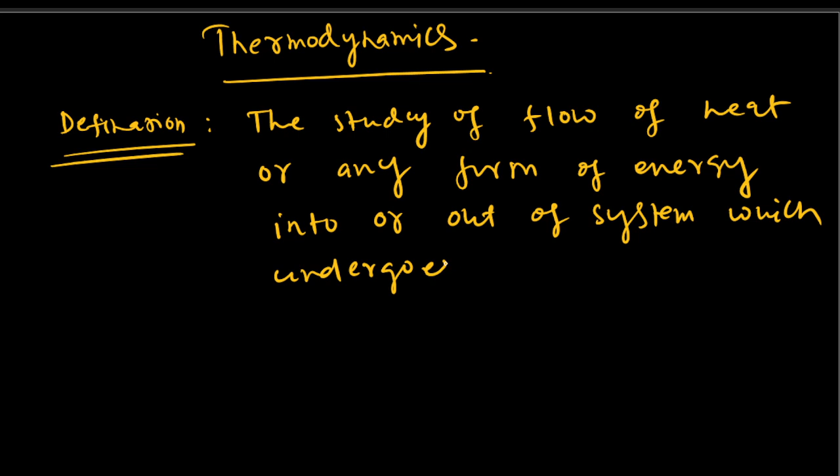Thermodynamics. So if you say the definitions, what we are doing here, you can say that it is the study of flow of heat or any form of energy into or out of systems which undergo a physical or chemical transformation.

So thermodynamics we can define as the study of flow of heat or any form of energy into or out of systems, which undergo physical or chemical transformations. So in thermodynamics we are mainly studying the flow of heat or any form of energy.

So before you start thermodynamics, we should know some terminology, some terms which we are using in these chapters repeatedly. So the terms of these chapters are: first is system. What is the system? System is the part of the universe which is under thermodynamic study.

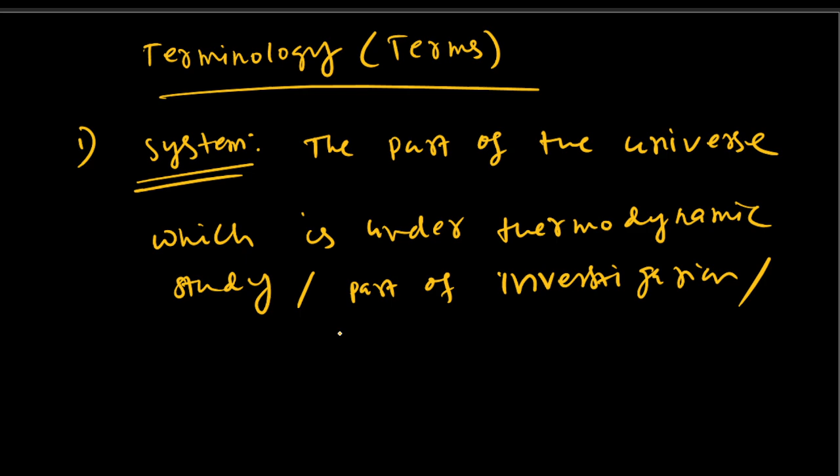Or part of the universe which we are interested in, or which is part of investigations. So the part which is under thermodynamic study, or part of investigations, or part of observance. So that is the part of the universe which we are actually interested in, which we are studying. So that part of the universe we call systems.

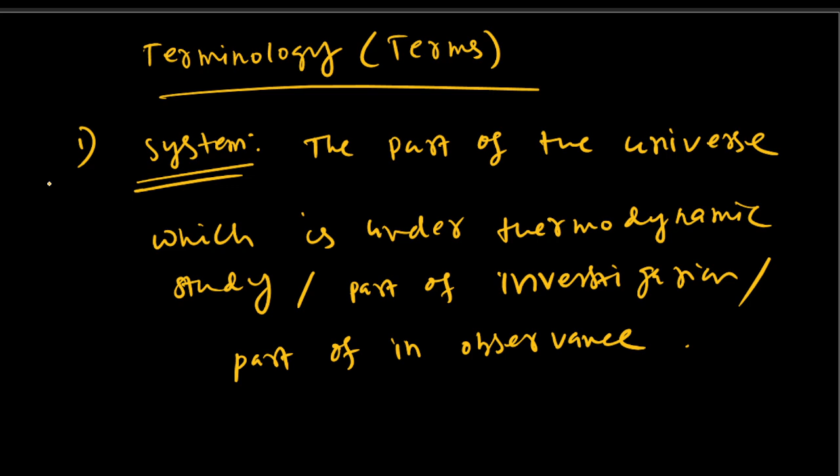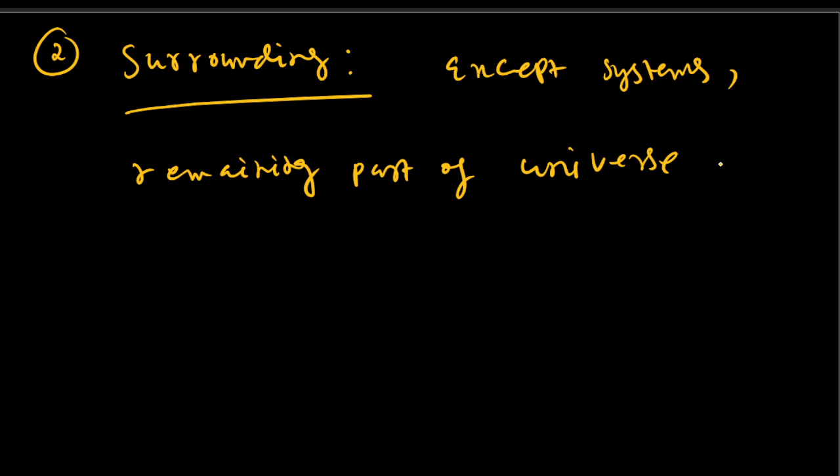And for surroundings, what is surroundings? So except systems, other parts of the universe are called surroundings. So except systems, the remaining part of the universe is called surrounding. So if you leave the systems, then whatever the remaining parts, all that is called the surrounding of that system.

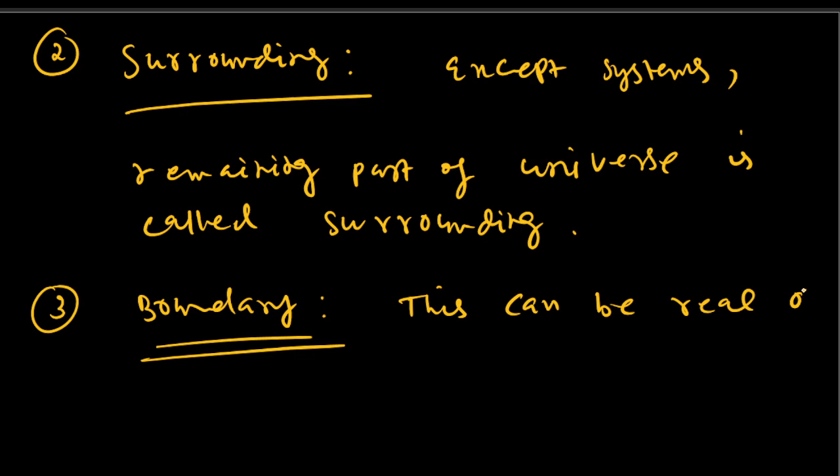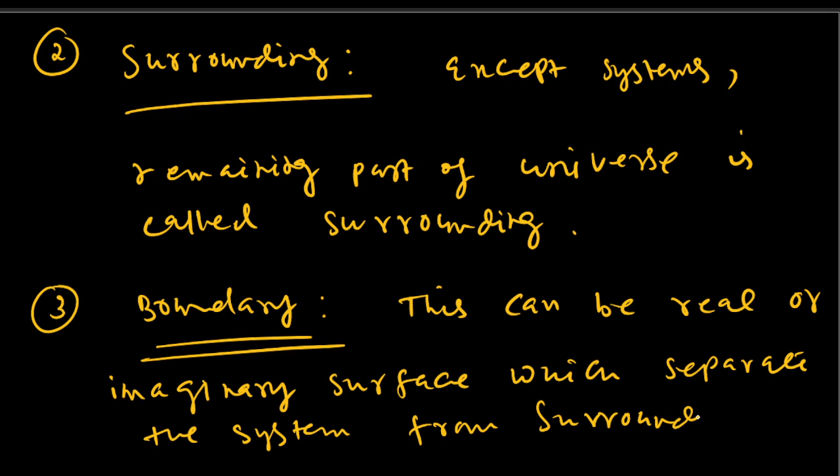So the next terminology we will look at is boundary. So what is boundary? It can be a real or imaginary surface which separates the system from surrounding. So that surface which separates the system from surrounding is called boundary. And this boundary can be a real boundary or can be an imaginary boundary.

So let's see this in the open systems. So this is system. Suppose this is water. So this water is system. Surrounding is the remaining part of the universe other than the system. So this is surrounding, this is surrounding. Except system, everything is surrounding. So these all are surrounding.

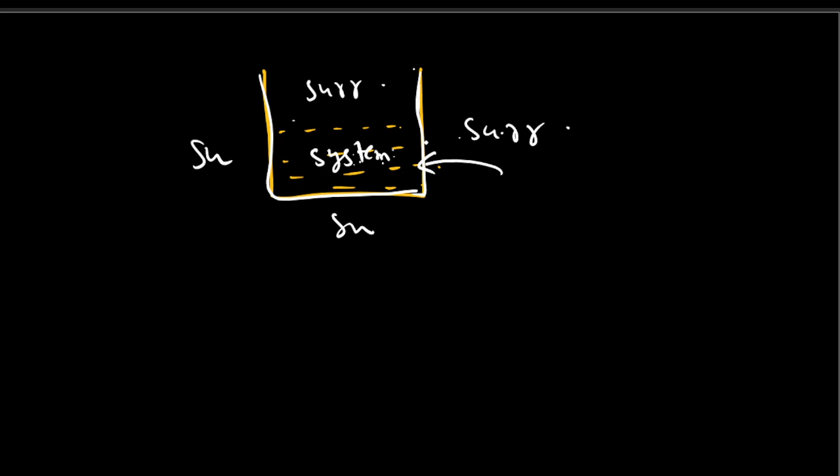So this system and surrounding are separated here, where no real boundary is present. But here, between this surrounding and this system, there is a boundary: this glass. Suppose this is a beaker made of maybe steel or something. So this is a real boundary, a real separation between this system and surrounding. And from here, this is surrounding, this is system, and these are separated, but there is no real boundary there. So this is an imaginary boundary. So boundary can be real or imaginary.

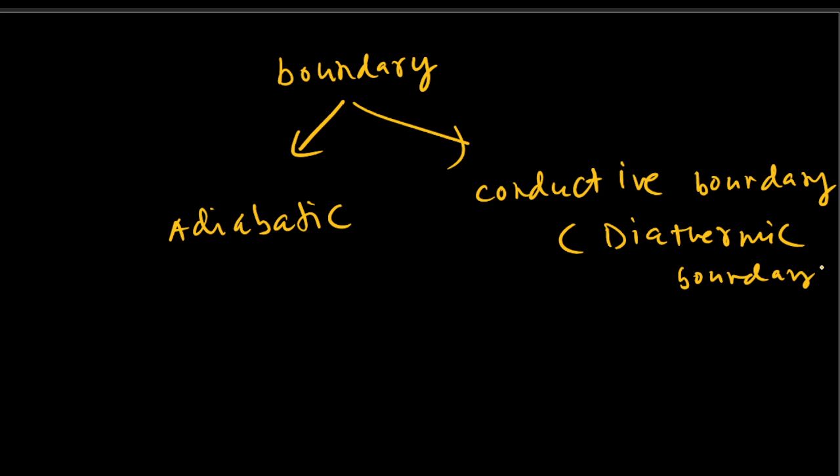And boundary can be adiabatic or can be diathermic. It can be adiabatic or can be a conductive boundary, which we can also call a diathermic boundary. So how can you say? Suppose this is a closed vessel and water is there.

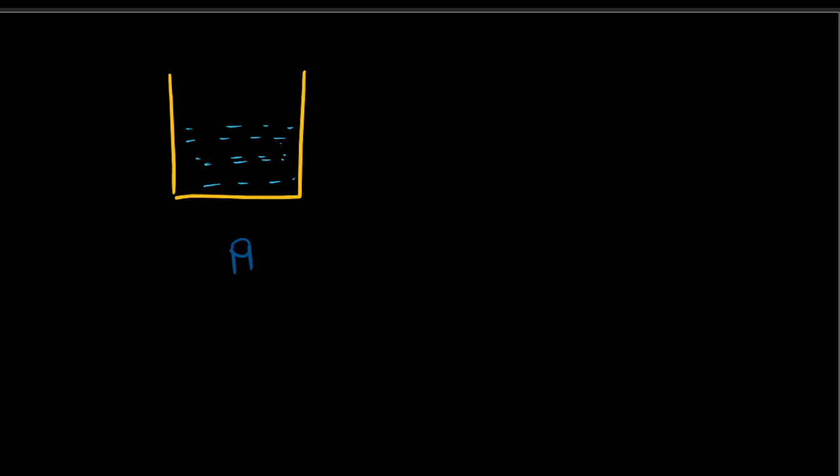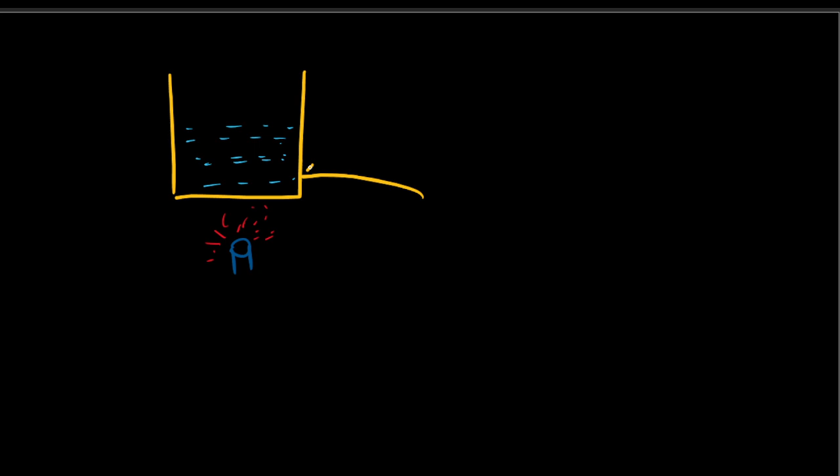And if you are giving heat, suppose this wall is a conducting wall, which means heat transfer can occur. So for a conducting wall, heat transfer can occur. So this heat will be transferred to this water, and this water gets heated and will evaporate. So here this boundary is called a conducting boundary.

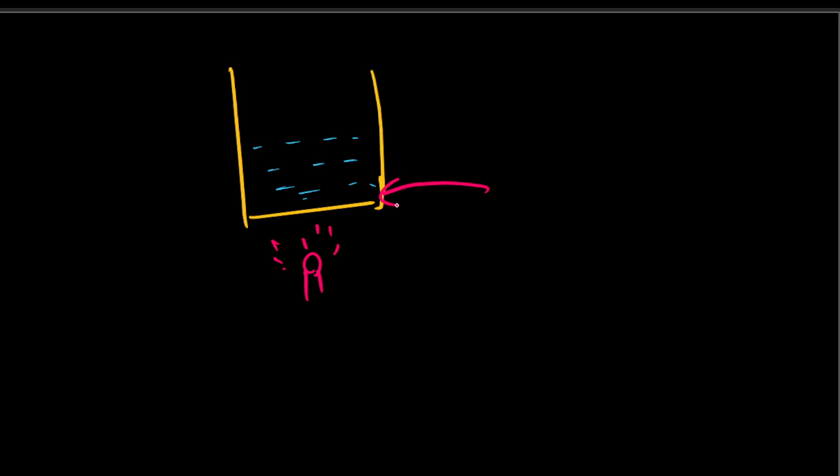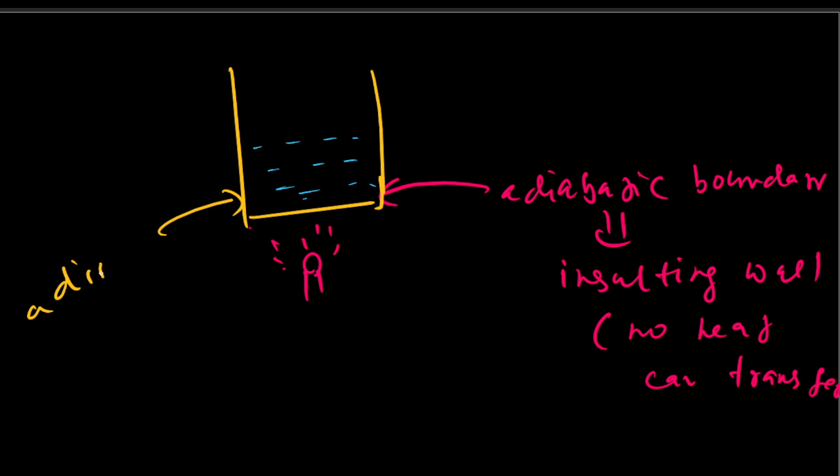And another type of boundary is, suppose here water is there, and again we are giving heat, but this is an adiabatic boundary. Adiabatic boundary means an insulating wall, meaning no heat can transfer. So in this case, if we heat, this water will not get heated because the wall is not allowing the heat to transfer. So this is an adiabatic boundary, where heat is not transferred. So boundaries can be real or imaginary, adiabatic or conductive. So next we will study the types of systems.

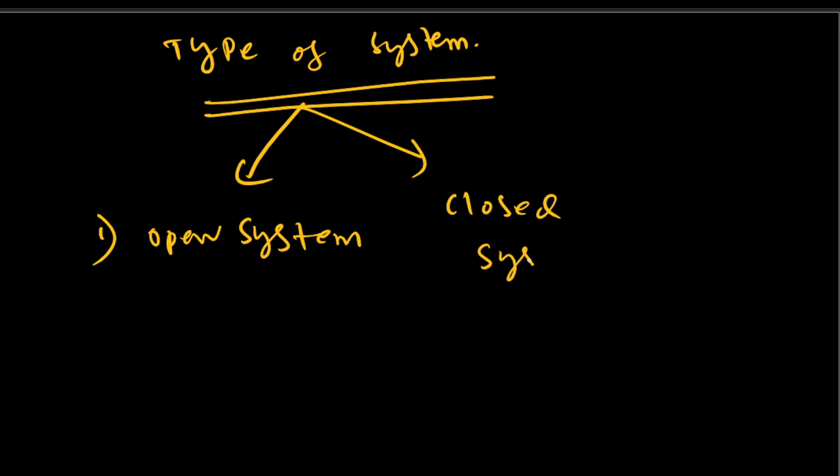So we have studied what is a system. A system is that part of the universe which is under thermodynamic study or under investigation. Systems can be of three types: one is open system, another is closed system, and another is isolated system.

So what are open systems? Open systems are the systems which allow the transfer of both matter and energy, that can be heat or work, from their surroundings.

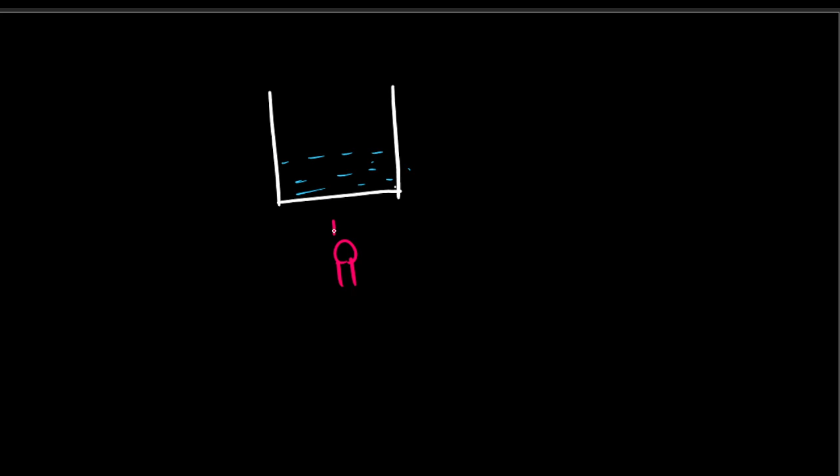What it says: the systems which allow the transfer of both matter and energy from their surroundings. So both matter and energy can transfer between system and surroundings. Then that type of system is called an open system. For example, suppose water is here and you give heat. This is open, so this is an open system.

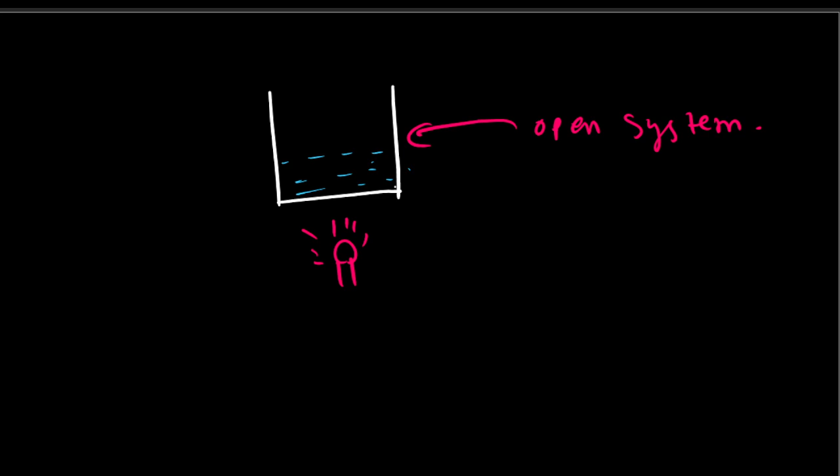If you give heat, this water gets heated, and this is a conducting wall. Since this is a conducting wall, it allows the heat to transfer. So heat can enter the system, where water is present, and this water gets heated, evaporates, and goes out from the system.

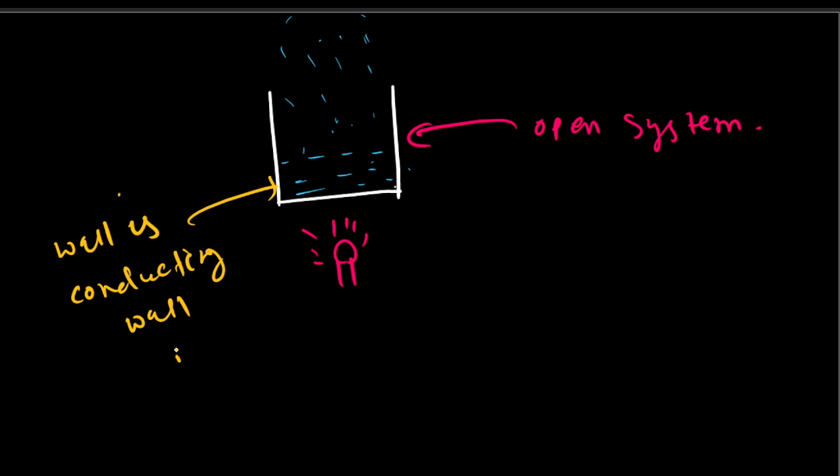So matter exchange is happening, because water is getting evaporated, meaning the amount of water is decreasing. The mass of the system is decreasing, so mass exchange is occurring due to the open system.

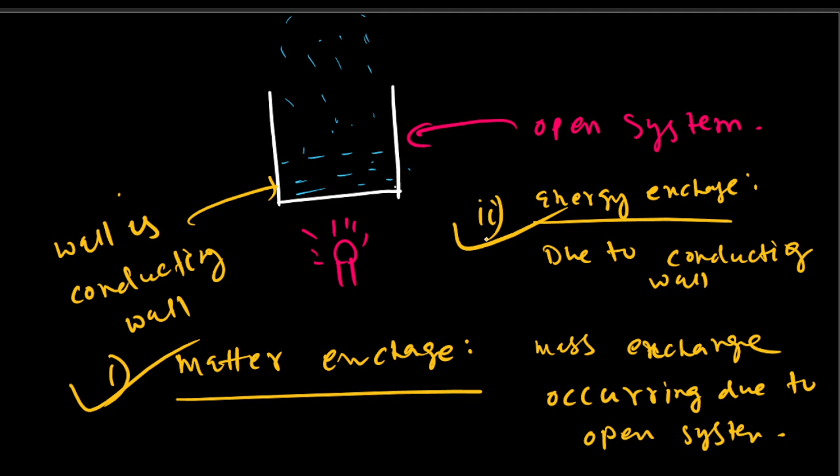And secondly, heat is transferring, meaning energy transfer also occurs. So energy exchange is also happening, due to this conducting wall. So both matter exchange and energy exchange are happening. For open systems, both matter and energy exchange can occur.

The second type of system is closed systems. A closed system is a system which does not allow the transfer of matter but allows the transfer of energy from its surroundings.

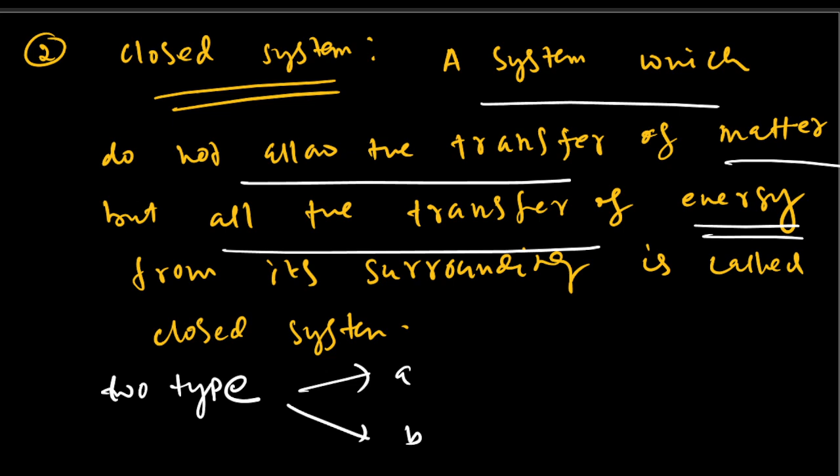So a closed system does not allow the transfer of matter but allows the transfer of energy. Matter will not transfer but energy will transfer, and closed systems can be of two types. Type A is where heat exchange occurs.

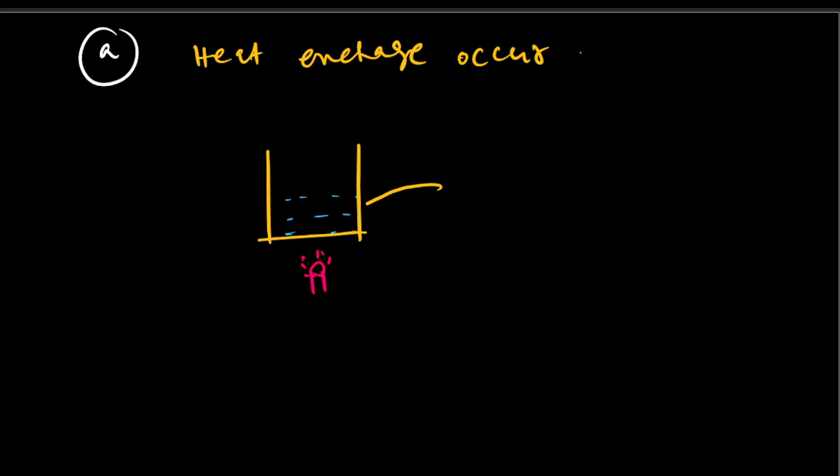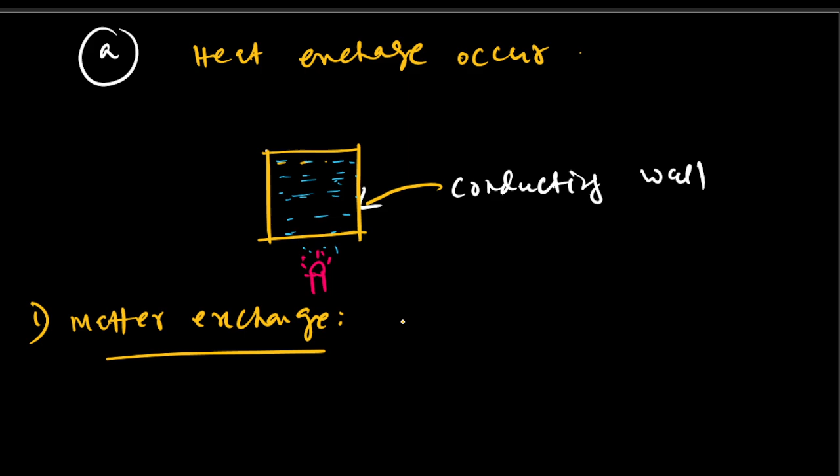Let's say water is here, and we give heat, and this is a conducting wall, and this is a closed system. So here, no matter exchange, due to the closed system.

But energy exchange: since this is a conducting wall, the heat can transport to the system, so the water gets heated. Heat exchange occurs due to the conducting wall.

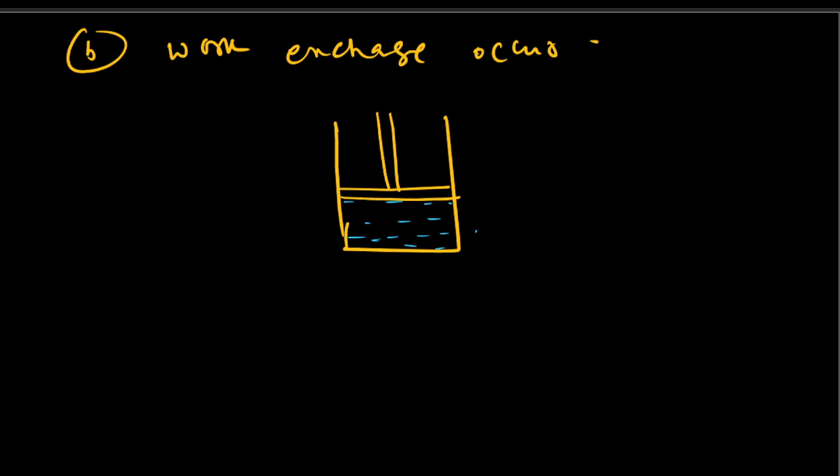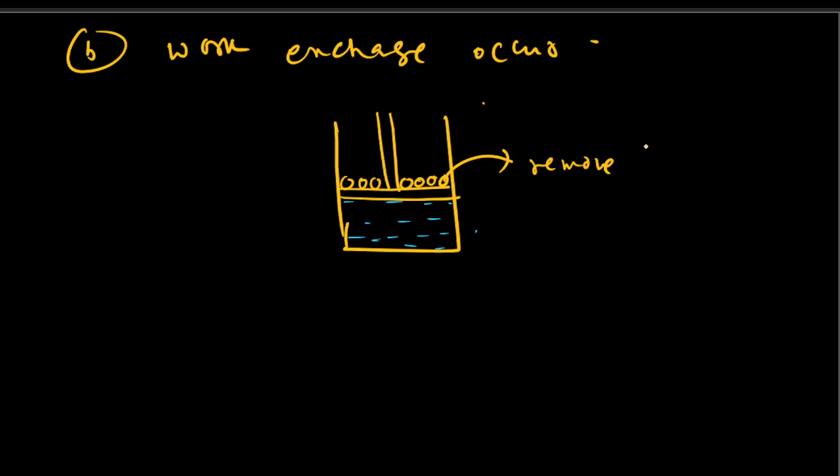Another type is where work exchange occurs. How? Suppose I take the same, water is there, and there is a piston. If you remove the balls, it will shift, or if I add more balls, then this water level will decrease.

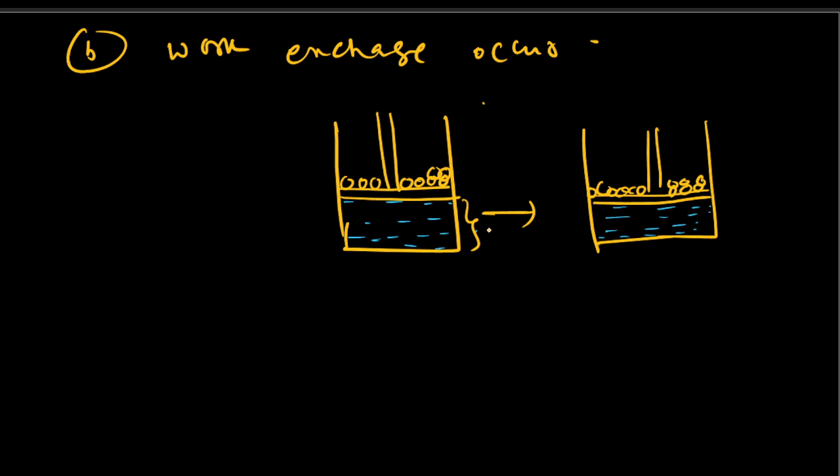So this volume is decreasing, and we know pressure is inversely proportional to volume. So if volume decreases, pressure increases. So here PV work is occurring. For this, no matter exchange due to the closed system, because matter cannot transfer.

Another is energy exchange. Energy exchange occurs due to work exchange. This type of piston we will study in reversible processes later. This is just an example of closed systems where energy exchange occurs due to work. Another way, energy exchange occurs due to heat.

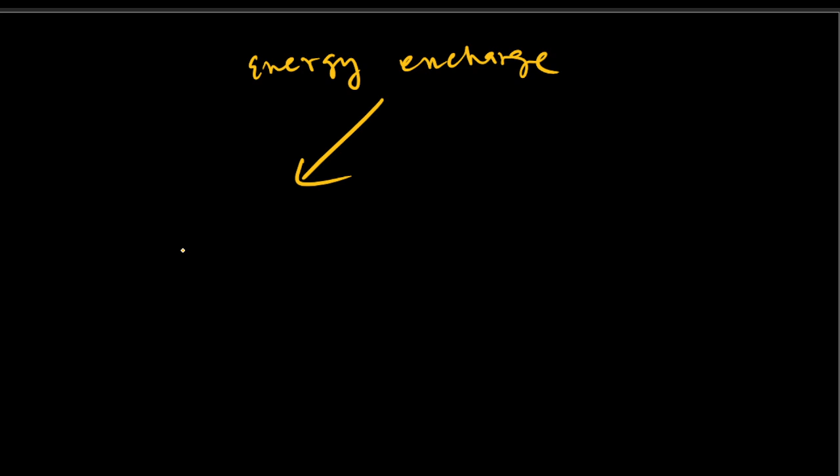Here this wall is an adiabatic wall, or insulating wall, so heat will not transfer. Then we can do energy exchange another way, by piston shifting, so work will occur. If work occurs, energy exchange occurs, because energy exchange can occur in two ways: either by exchanging heat or by doing work.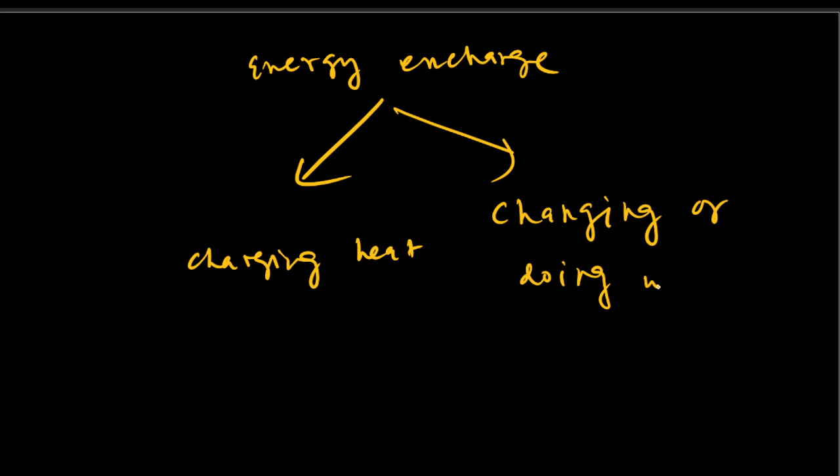So in the first case, by exchanging heat, energy exchange occurs. And in the second, by shifting the pistons, work exchange occurs. So work is done, so energy exchange occurs. So closed systems we can explain in two ways. If the wall is insulating and a piston is there, then work exchange occurs, and it is also a closed system. And if the wall is a conducting wall, then heat exchange occurs, and it is a closed system; energy is exchanging because it is a conducting wall, so heat transfer is occurring.

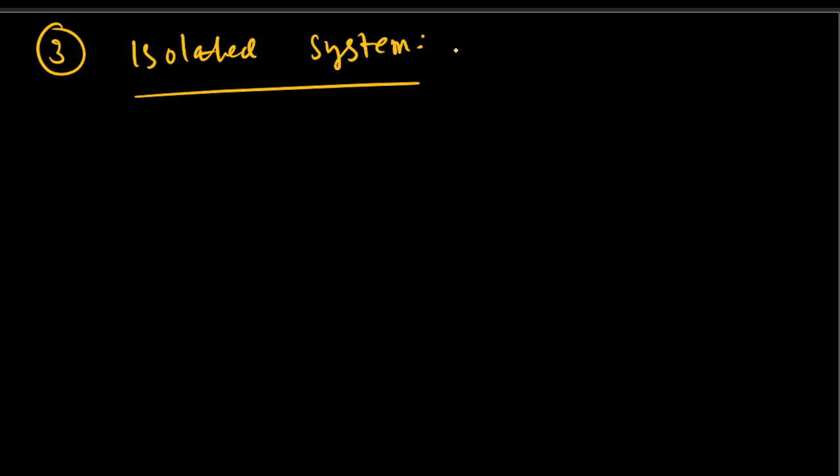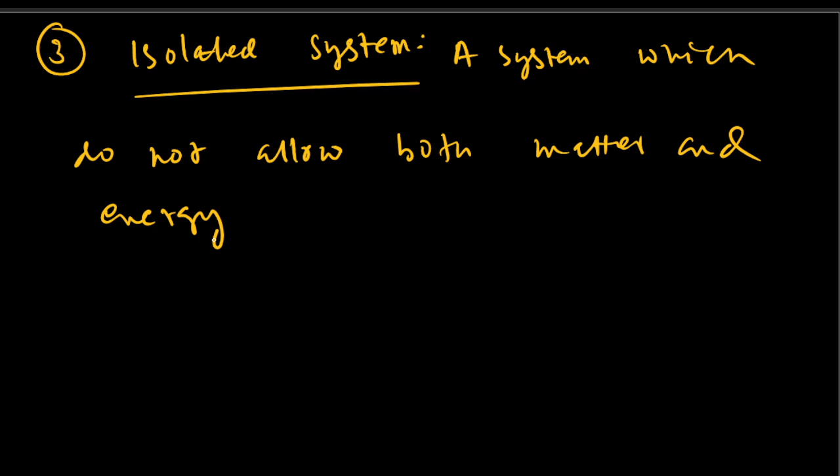So the third type is isolated systems. Isolated systems: a system which does not allow both matter and energy exchange, which does not allow matter and energy exchange or transfer from its surroundings.

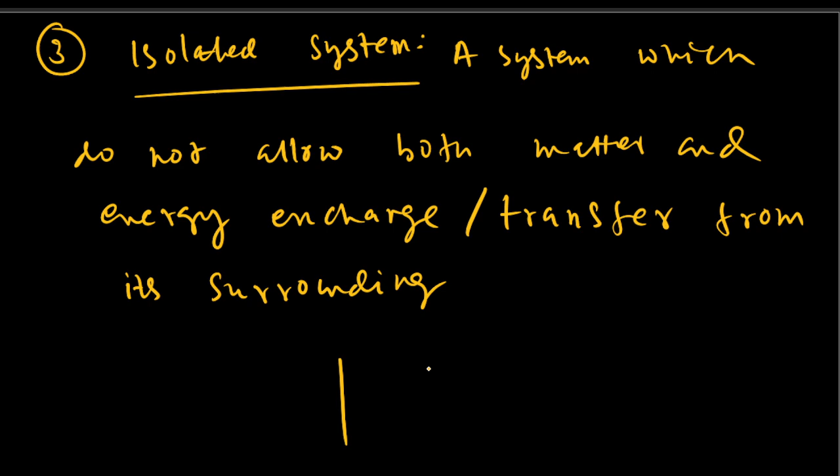So if I say this is the wall, and this is a closed system, and water is there, and at the same time this is an insulating wall. So if it is an insulating wall and it is a closed system, we cannot exchange the matter because it is a closed system, and energy transfer is also not possible because it's an insulating wall. And if a piston were given, then we could do another exchange by doing work, but the piston is also not there. So here no matter or energy can exchange. So this is a type of isolated system.

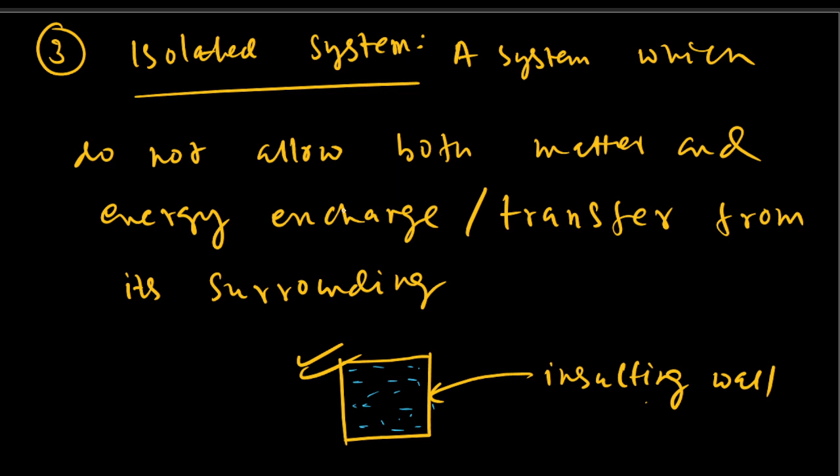So next we will study the properties in thermodynamics. These are properties because they are applicable for all. So first is extensive properties. What are the extensive properties? The properties which depend on the quantity of matter present in the system. So an extensive property is a property which depends on the quantity of matter present in the system. So that property is known as an extensive property.

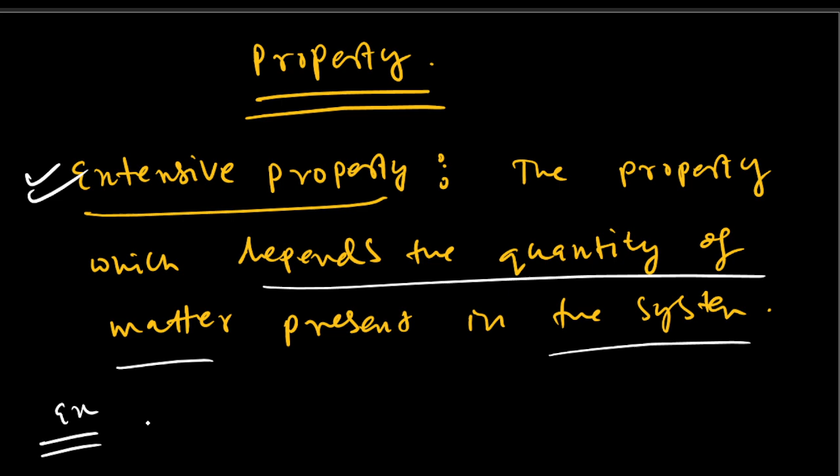So if I give examples, like volume, and extensive properties which depend on the quantity of matter: you can say enthalpy, which we will study after some time, Gibbs free energy, and internal energy. These are extensive properties. They depend on the quantity of matter.

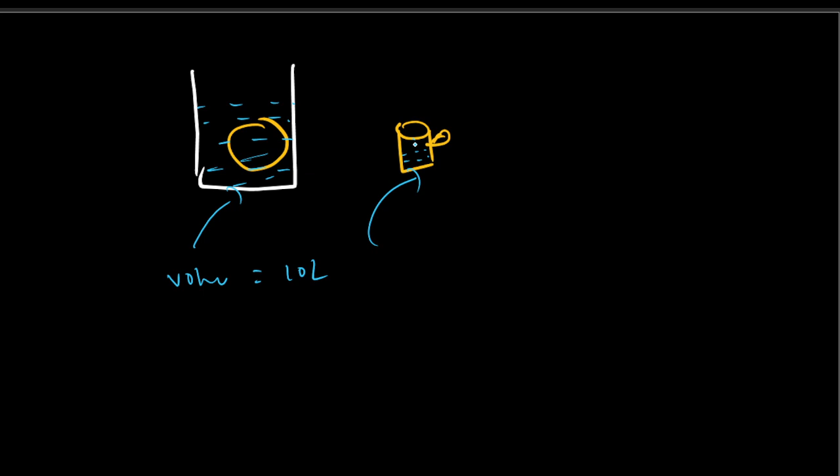So if I say this is a bucket of water here, let's say I take some water from it with a mug. So this is the mug. The volume of this water is different, and the volume of that water is different. Suppose the volume of the bucket is 10 liters, and the volume of the mug may be 2 liters. So the volume is changing. If you take water with a mug, the volume of the water in the bucket and the volume in the mug are different. So it depends on the quantity. So those types of properties are called extensive properties, like volume, enthalpy, Gibbs free energy, internal energy.

Next, we'll study the intensive properties. The property which does not depend on the quantity of matter present in the system. So an intensive property does not depend on the quantity of matter. So the property which does not depend on the quantity of matter present in the system is called an intensive property.

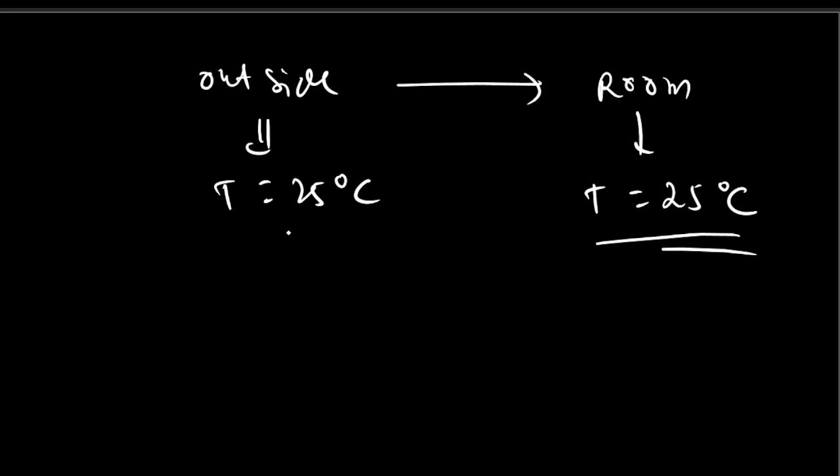If you see the examples, like temperature, pressure, refractive index, we can say concentration like molarity, molality, normality, mole fractions, etc. So suppose you are outside, and the temperature is 25 degrees centigrade. When you come into the room, the temperature is also 25 degrees centigrade. So the temperature remains the same both outside and inside; it does not depend on where you are. So that is an intensive property.

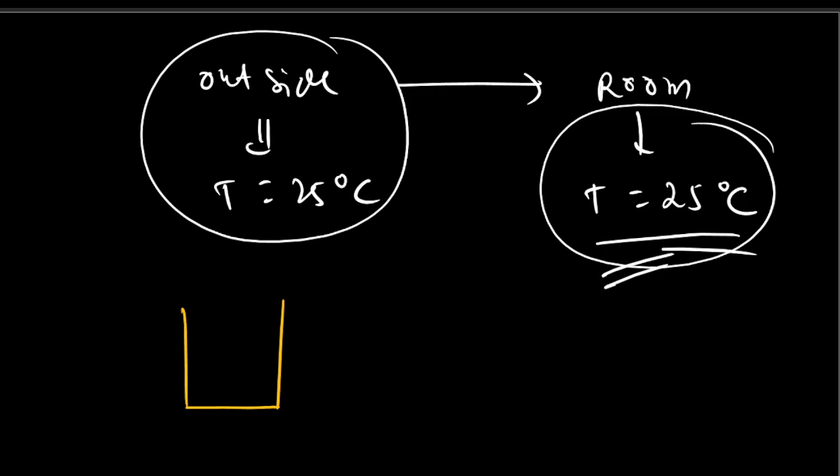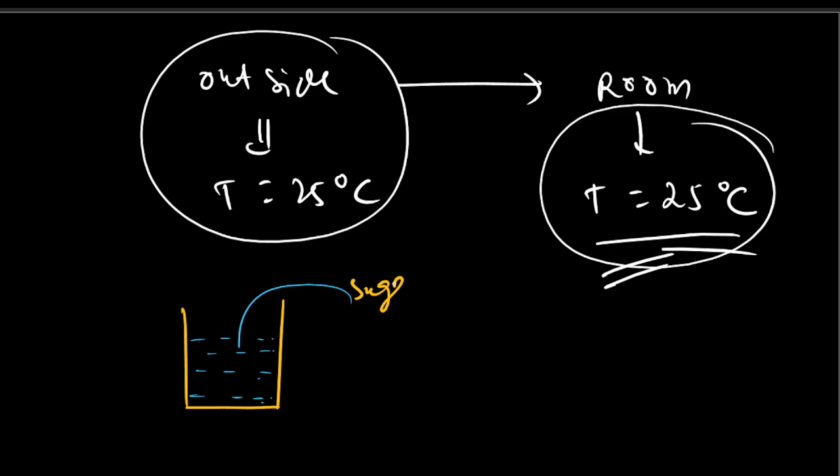Or we can say, suppose this is a bucket of water, and I mix it with sugar. So this is a sugar solution. And if you take a little of the sugar solution from here in a mug, then the taste of sugar in the mug and the taste of sugar in the bucket are the same.

So if you taste the sugar solution in the bucket, and at the same time you take a small amount from the bucket with a mug, and you taste both solutions, the taste will remain the same, because the concentrations in both the bucket and the mug remain the same. So concentration is not changing. So this is a type of intensive property.

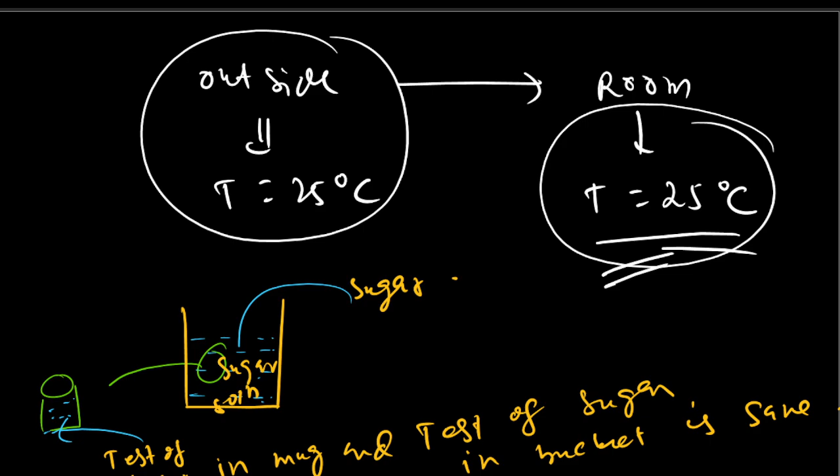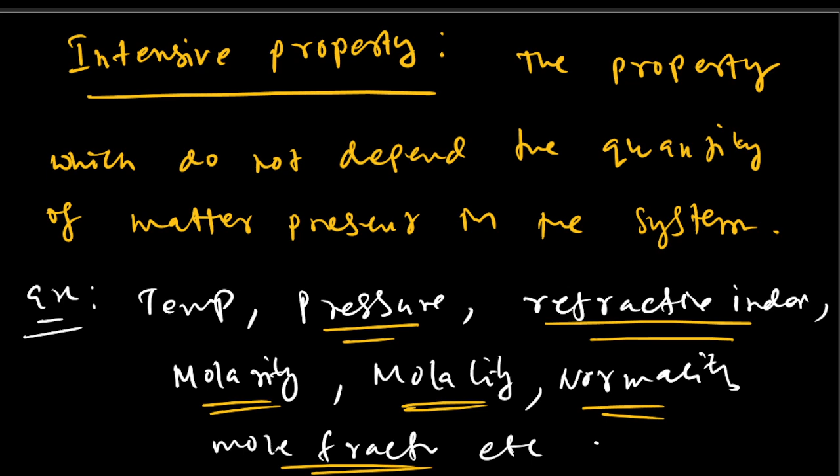So like that, pressure, refractive index, molality, all these things come under intensive properties. But how will we understand whether this is intensive or not theoretically? The ratio between two extensive properties is intensive. So in the exam we can understand whether this is intensive or extensive. How? Just take the ratio of two extensive properties. If the ratio of two extensive properties is intensive, then that is intensive.

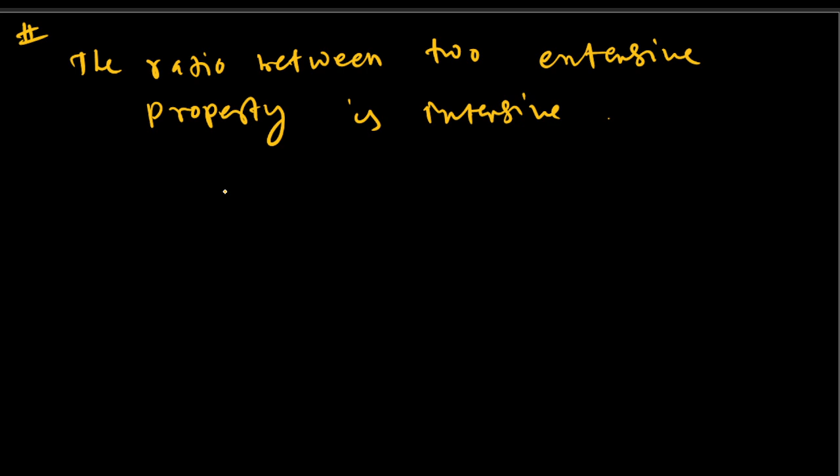Suppose you take molarity. Molarity is number of moles per volume in liters. Number of moles is an extensive property, and volume is also an extensive property. If you divide these two, the result is intensive. So if two are extensive, then the result is always intensive.

So if both are extensive, then the value of the ratio is always an intensive property. In this way we can identify whether the given property is extensive or intensive, by taking the ratios. If the two values are extensive, then the ratio will always be an intensive property.

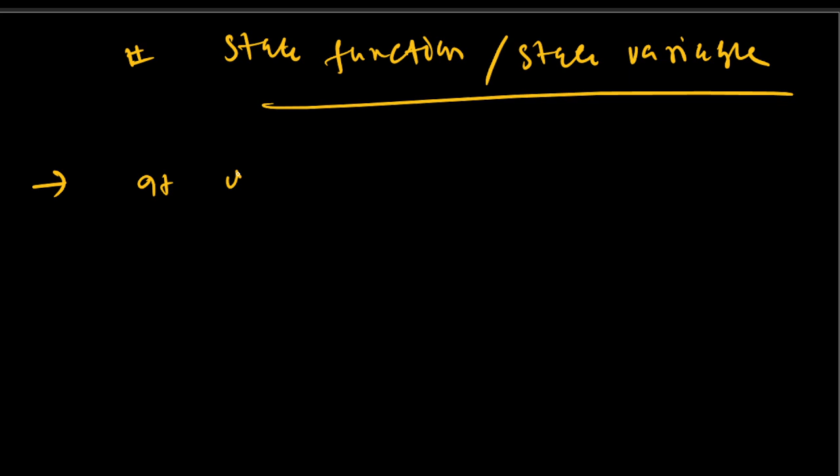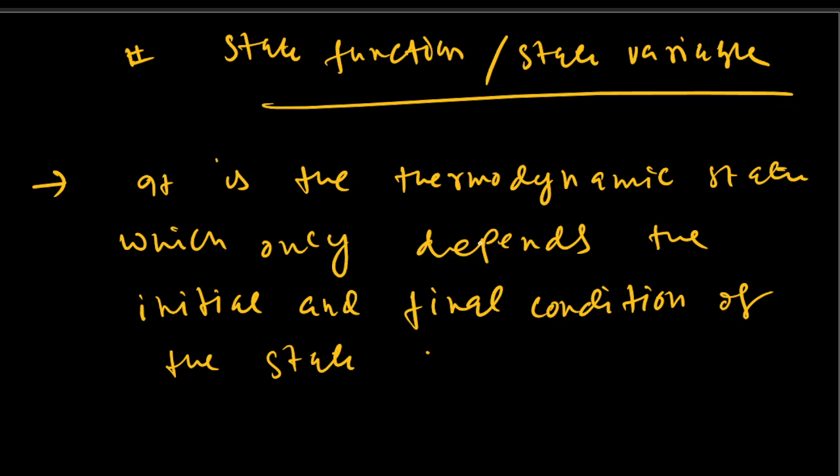Next we are going to study state functions or state variables. So what is a state function? It is the thermodynamic state which only depends on the initial and final condition of the state. So a state function is a thermodynamic state which depends only on the initial and final condition of the states.

The examples are all thermodynamic quantities except heat and work. So P, V, T, enthalpy, free energy, all are state functions. Except heat and work, all are considered state functions.

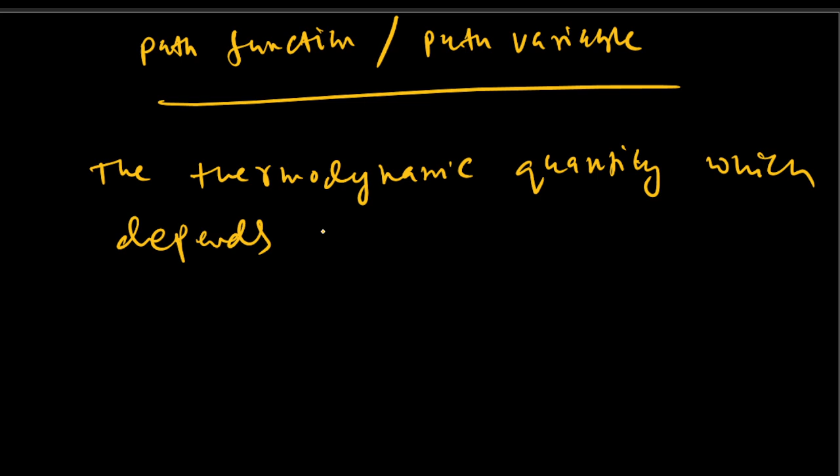And path functions or path variables are what? The thermodynamic quantity which depends on the path it follows.

So in the PV curve, going from here to here to P2, V2, for all these paths, this is q1, q2, q3, q4. Going by different paths, q will be different. q1 is not equal to q2, not equal to q3, because it depends on the path it follows. Similarly w. So q and w are path functions, they depend on the path it follows.

After some time we will discuss in detail how q and w depend on the path, and why they are not state functions. For the time being, you are just understanding the terms used repeatedly in this chapter.

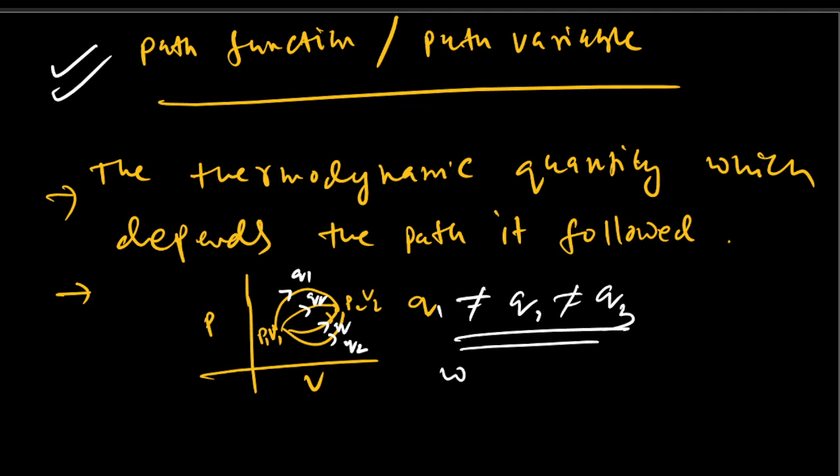Next we will study reversible and irreversible processes. First, the reversible process. What is a reversible process? Suppose I take this, and suppose this amount of gas is there, and I have given the piston. Or I'll just erase this.

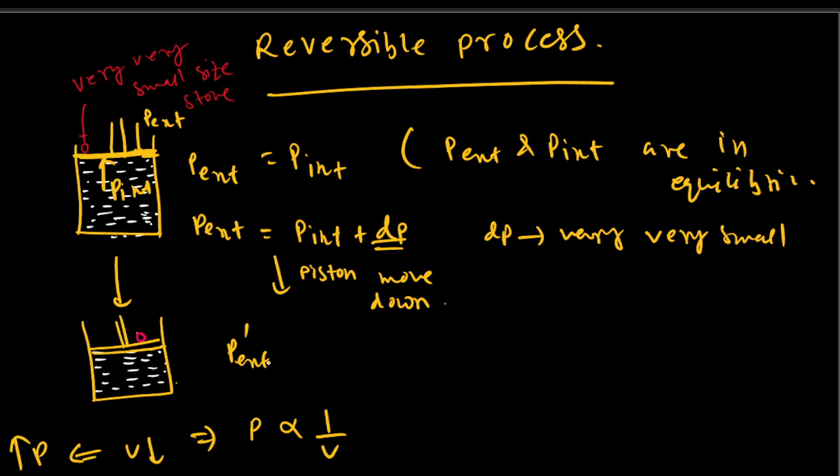So after that, P external becomes this. After adding the dP, P internal also becomes that, and the piston will stop. So again P external dash and P internal dash are in equilibrium. If the piston has stopped, it means they are in equilibrium. Since volume decreases, pressure increases, and internal pressure comes to equal P external dash. So again it will stop. Now, again, I will add one more stone.

Then again the piston has moved a little down, and now I have added two small stones. When I add one more stone here, P external becomes more than P internal, that is P dash external equals P dash internal plus dP, which means again the volume will decrease and again the pressure will increase. The piston will move down, then the pressure increases, and again P dash external equals P dash internal.

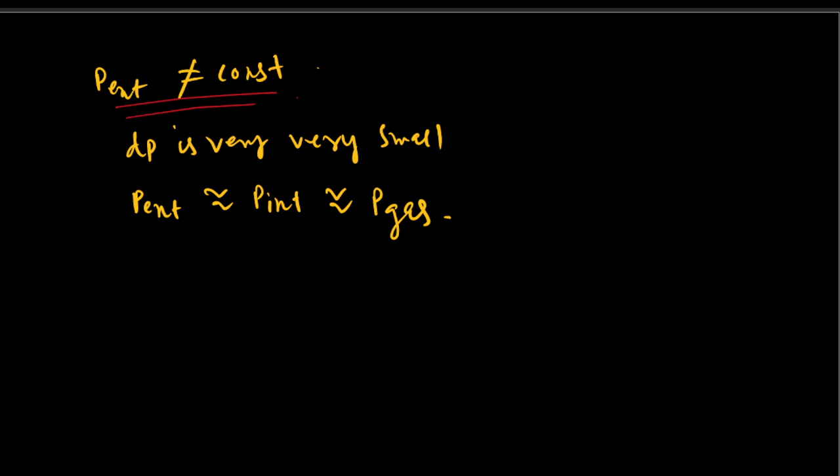So whenever we are deriving the equations for work in a reversible process, we again study that P external is not constant, and that P external equals P gas, because P external is nearly equal to P internal, and P internal is actually P gas. And since P external is changing in the whole process, P external is not constant. So this is happening in infinite steps to complete the process, and it is a very slow process.

And every time equilibrium is achieved, or at every step, I can say at every step equilibrium exists. And here the driving force is adding up stones, so the decreasing of volume is the driving force.

So the driving force is very less. I can say the driving force is greater than the opposing force, but only very slightly higher than the opposing force. Means the driving force is a little higher than the opposing force. So I can write:

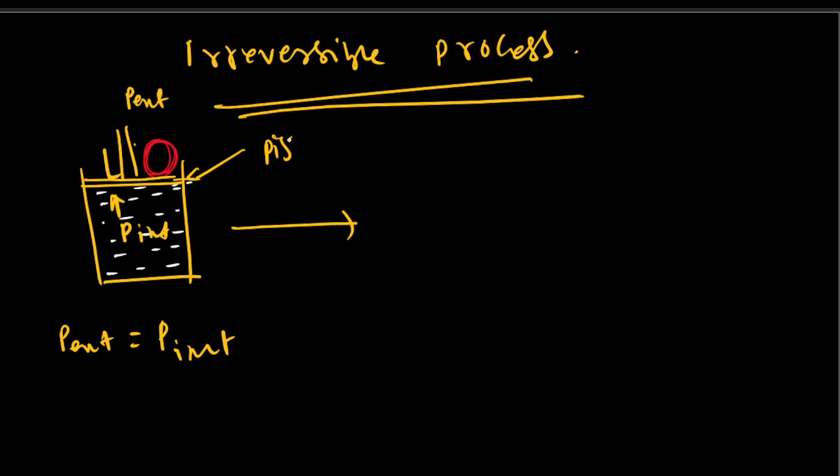So the piston is here. So what happened? I add bigger stones. This amount of stones I add at one time. Then what happened? So P external was there previously and P internal was there. Since P external and P internal were the same, that's why the piston has stopped here. The piston stopped because P external equals P internal.

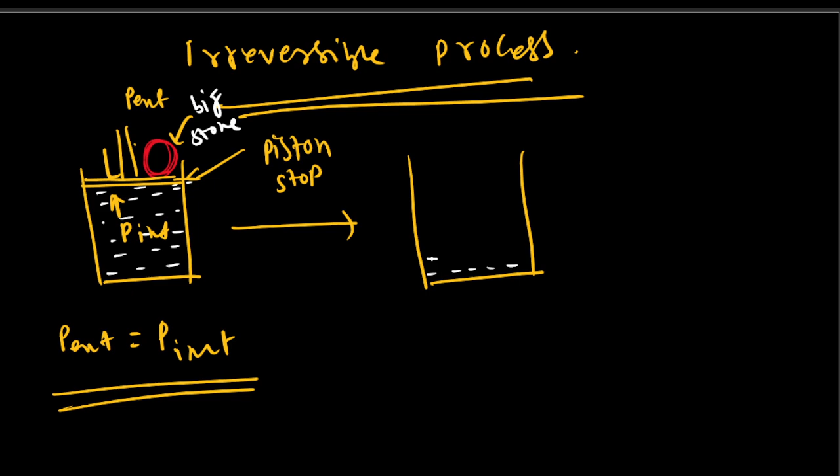But whenever I add a big stone, let's say this is a big stone, then the piston has moved, so in a single step it has moved from here to here. So here what happened is that P external differs from P internal by a delta P. A bigger stone I added, so delta P means a considerable amount of pressure change. So the piston has moved from here to here in a single step.

So here the volume decreases, and we know that P is inversely proportional to volume. So if volume decreases, then pressure will increase. So this is initially. Then what happened after you add the stone? After the stone is added, P dash external equals again P dash internal, because volume has decreased, so pressure has increased, and this pressure of the gas again becomes equal to P external. So again these become equal, and again the piston has stopped because P external and P internal are equal, and they are in equilibrium.

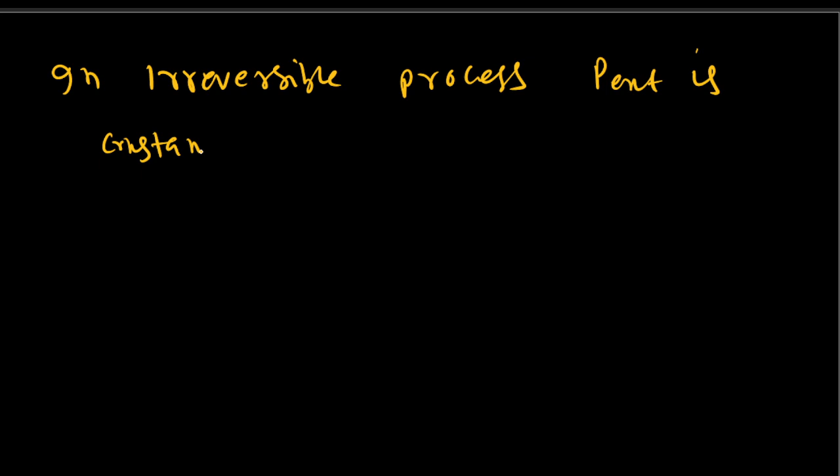Because the piston shifted one time only. So from this to here, only one time the pressure has changed. So from this to this, P external remains constant. So that's why I say that in an irreversible process, P external is constant, because it happens in a single step.

Whereas for a reversible process, it happens in an infinite number of steps. So at each step P external is changing, becoming more and more. Suppose initially this is 2 atm, then it will become 2.1, then 2.2, then 2.3. So P external is changing.

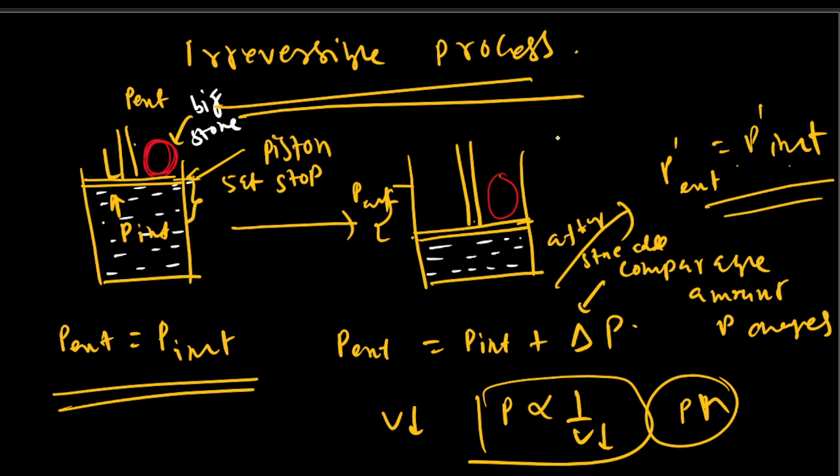But for an irreversible process, suppose initially it is 2 atm and you add 5 atm, then in a single step it becomes only 5 atm. So P external remains constant. So in an irreversible process, P external is constant because the piston shifted one time only. It occurs in a single step.

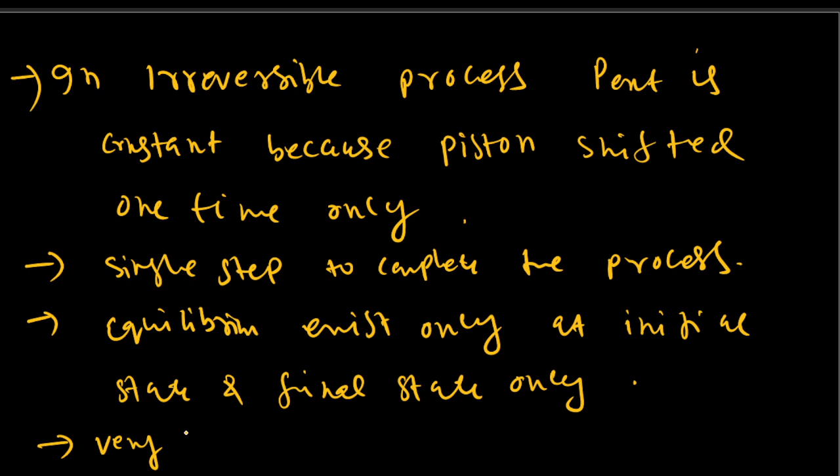So a single step completes the process, and equilibrium exists only at the initial state and final state, because no intermediate is there. So there is no question of equilibrium existing at intermediate states. And here the process occurs very fast.

And here the driving force is the decrease of volume, and it is very much higher than the opposing force. So the driving force has a very high value compared to the opposing force. Okay.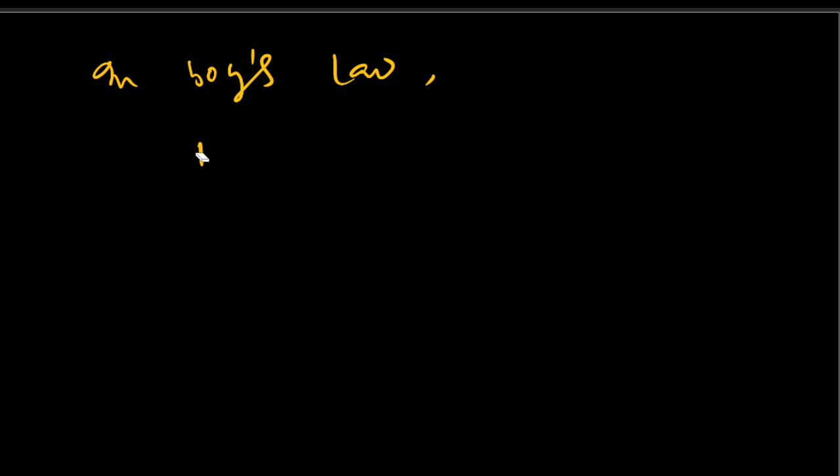So next we will study the types of process. One is the isothermal process. The process in which the temperature remains constant, that is delta T equal to 0. So in Boyle's law, at constant temperature, P is inversely proportional to volume.

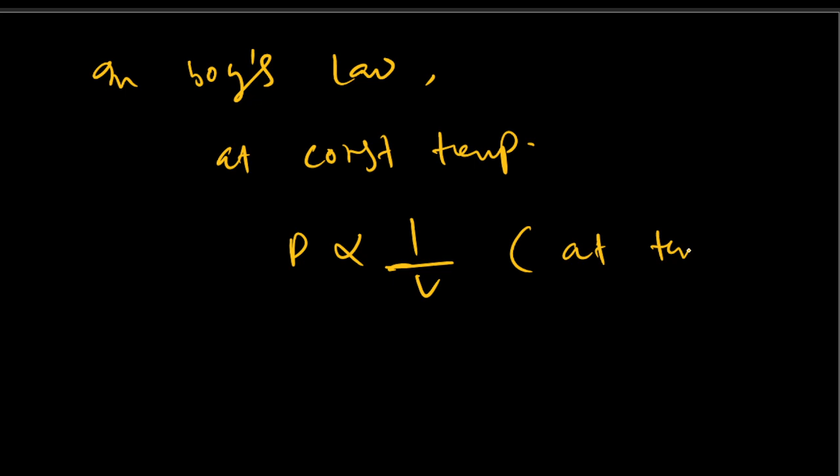So at constant temperature, if we draw the PV curve for the isothermal process, if volume increases, then pressure decreases because of the inverse relationship between them. So this will be like this. As the volume increases, pressure is decreasing.

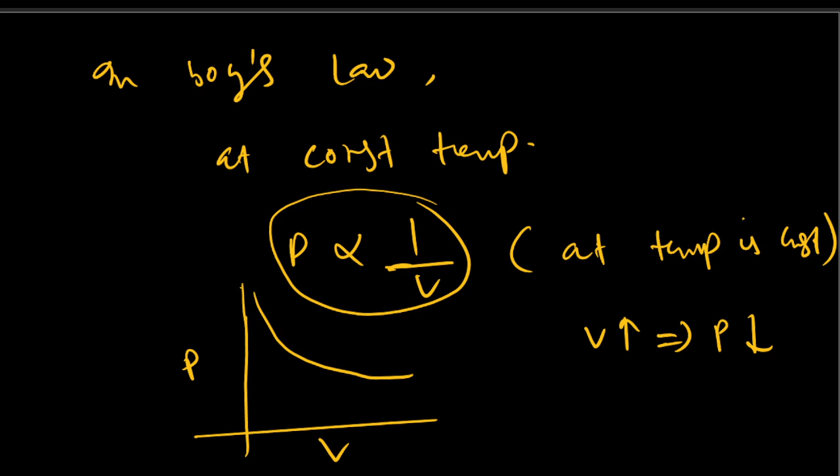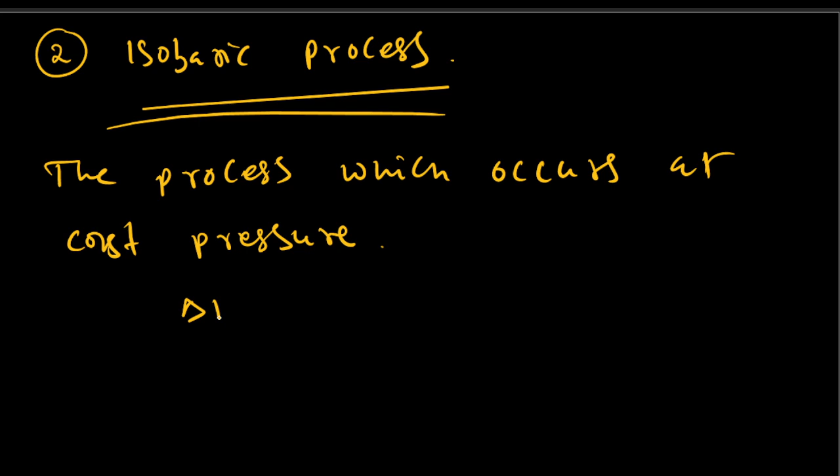And the next process is the isobaric process, the process which occurs at constant pressure, that is delta P equal to 0. So what is the PV curve? Isobaric means pressure is constant, right?

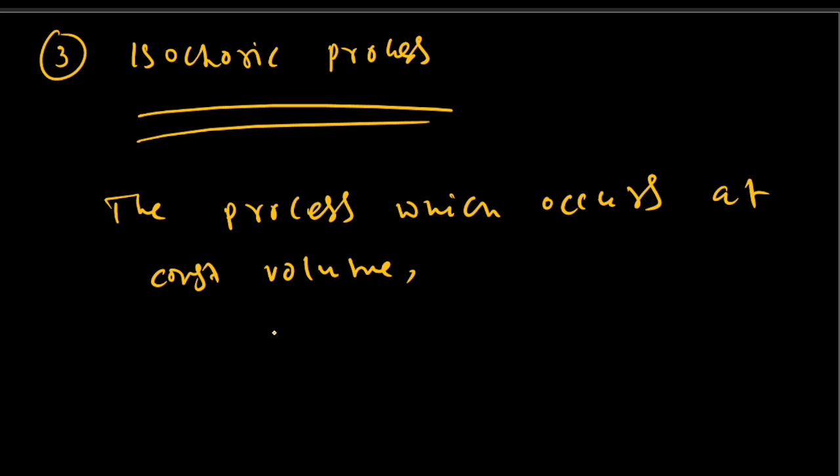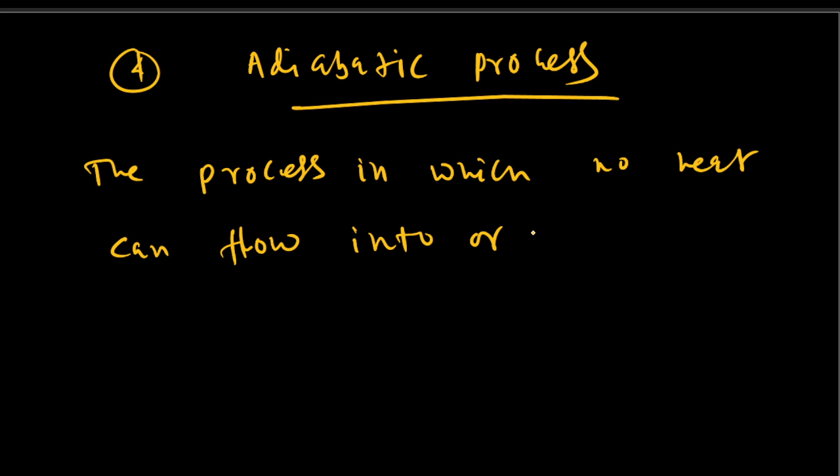And next, the adiabatic process: the process in which no heat can flow into or out of the system. In the PV curve, this is nearly like the isothermal, but the slope is a little bit steeper than the isothermal.

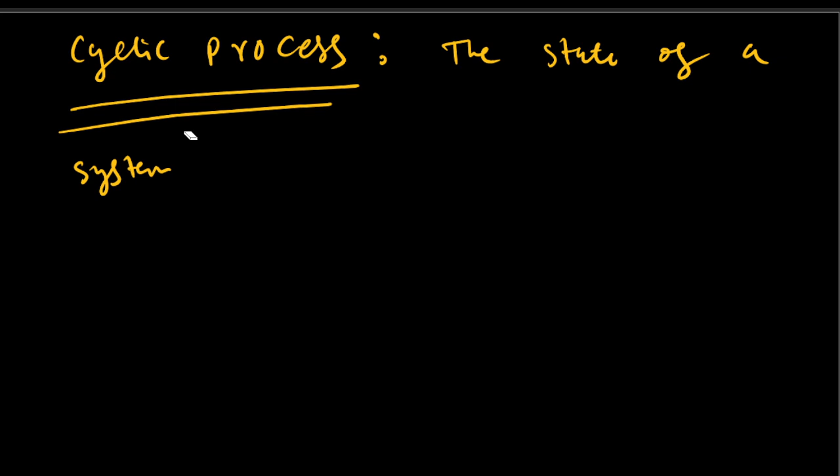So the last process is the cyclic process. For a cyclic process, we can define it as the process of a system at a given state which can occur by different processes,

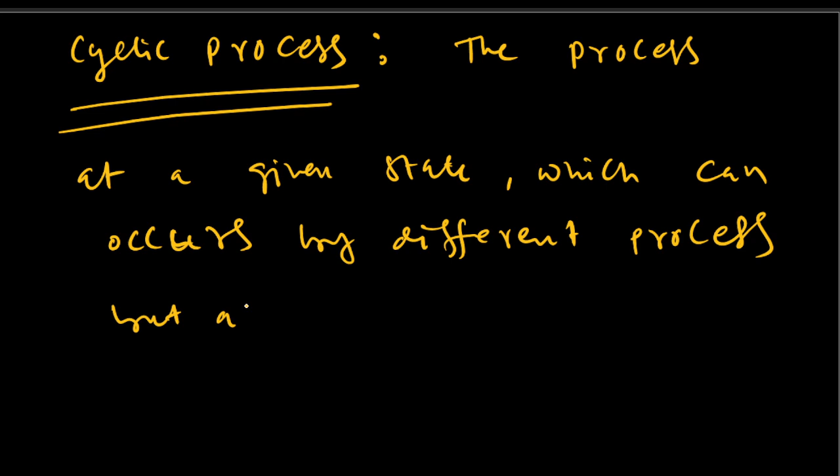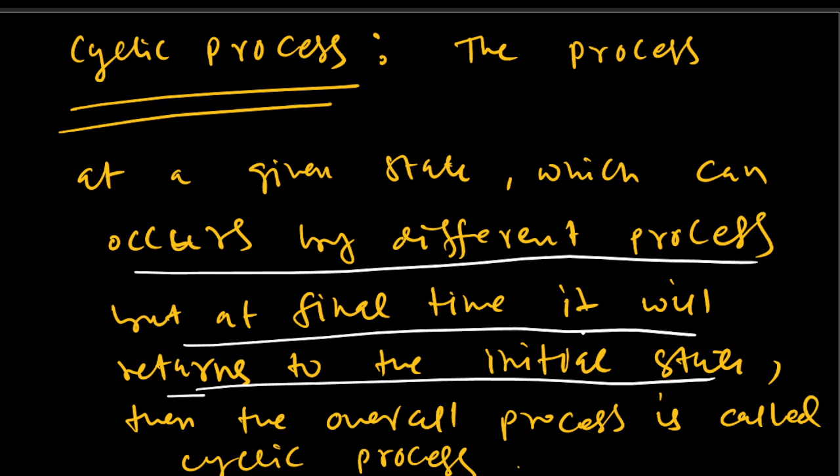but at the final time it returns to the initial state. Then the overall process is called a cyclic process. So the process at a given state which can occur by different processes, but at the final time returns to the initial state where it started, is called a cyclic process.

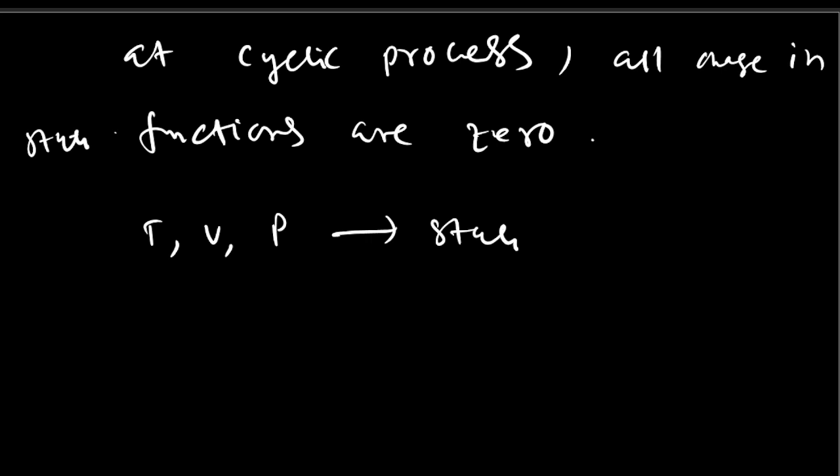So for example, in a cyclic process, all changes in state functions are 0. Suppose state functions are temperature, volume, pressure; these all are state functions.

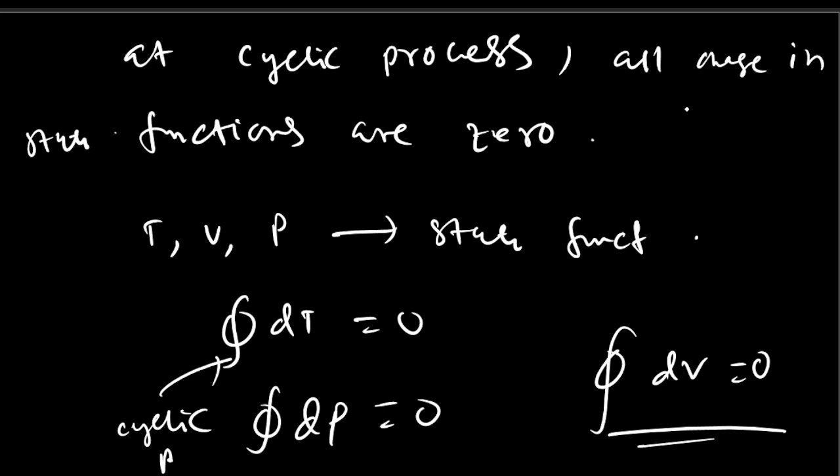So in a cyclic process, the change dT is equal to 0, dP equal to 0, dV equal to 0. So in a cyclic process all changes in state functions are 0.